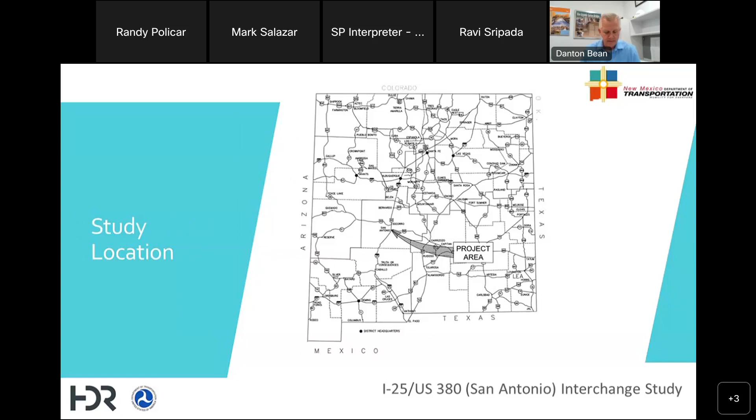Let's go now to the study location. So the project is located about 90 miles south of Albuquerque or 10 miles south of Socorro in the San Antonio area. The study area includes I-25 from milepost 139 to 140 and the interchange of US 380 with I-25 and all of those associated ramps. The study area also includes Walnut Creek, the major waterway in the area of the interchange.

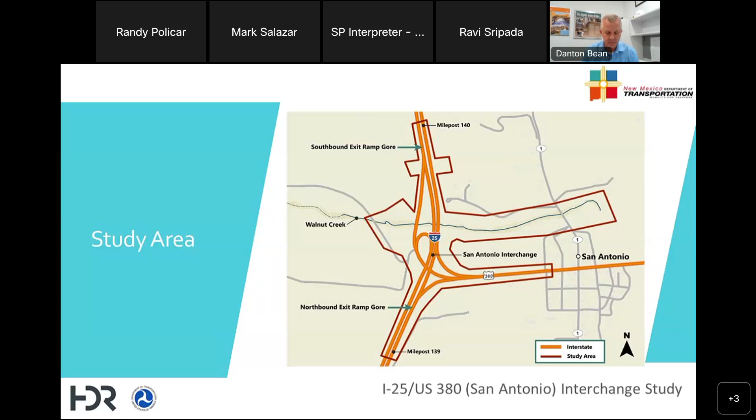So now that we've established the study area, let's talk now about the purpose of this meeting. We want to give you updates on the development and the status of this study. The team as always wants the public input in the development of a study. The daily users are the ones that know the area the best, and we want your insights and feedback to the issues and solutions.

We are currently in the study phase. We plan to hold 2 public meetings in this study effort to seek your input and comments. The development of the project will then move into the environmental investigation and documentation phase, and then into the preliminary design. The project will conclude with final design and construction.

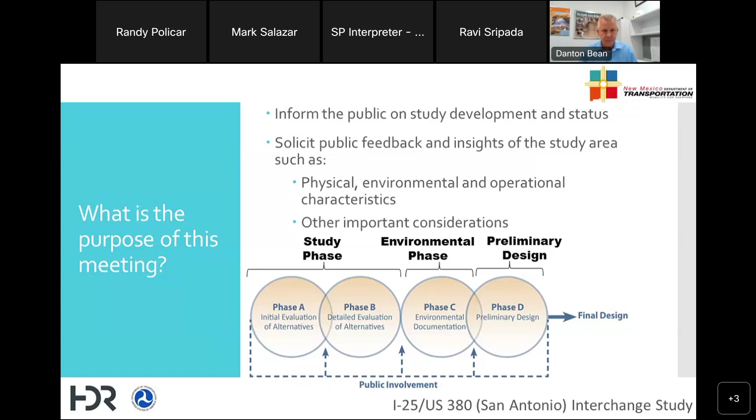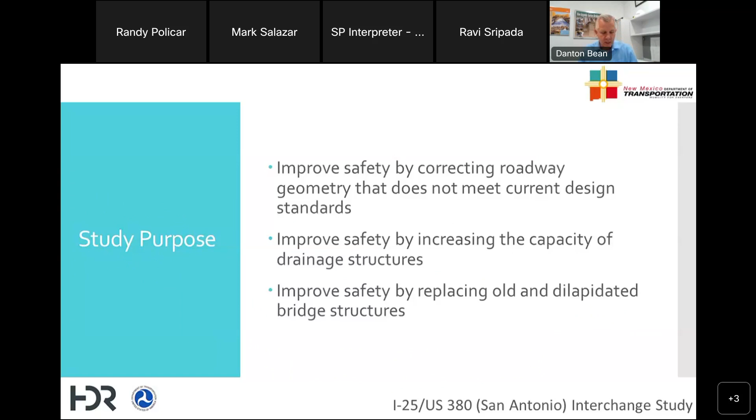So now the purpose of our study. Safety is always a top priority for the team. And so we're studying how to improve that level of safety. And that includes looking at the roadway geometry, drainage structures, bridge structures, and what we can do to improve that safety. So now we would like to present the different issues that we found in the existing conditions. And so I'd like to start with the roadway discipline and turn the time now over to Ravi.

Thank you, Danton. Good evening, everybody. My name is Ravi Sripada. I'm the roadway engineer for this project. I'll provide a brief description of existing roadway conditions and geometry for I-25 mainline, ramps, and for US 380 within the project limits.

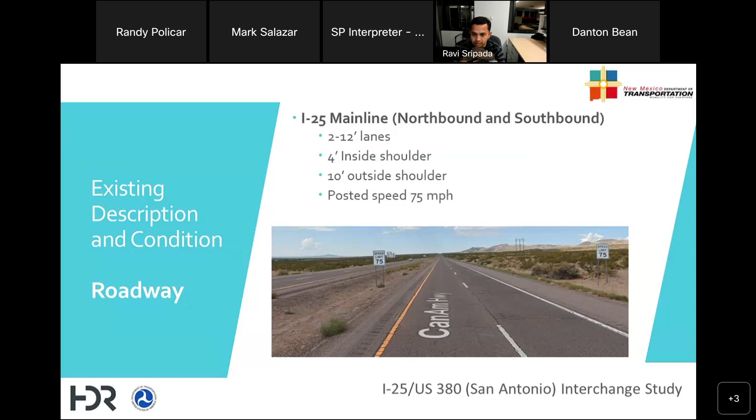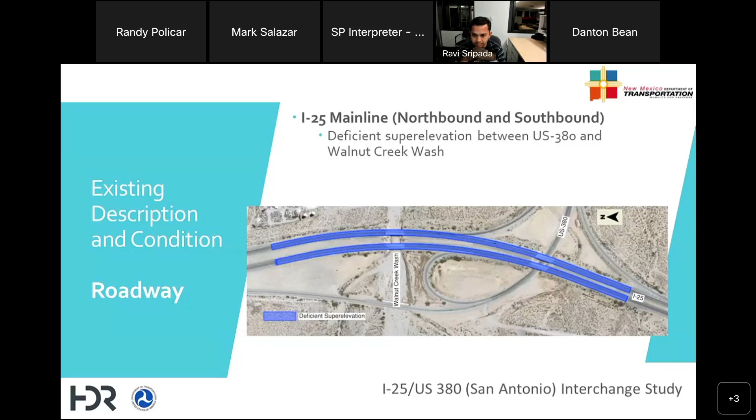As you can see in the picture, existing I-25 northbound on-ramp is yield controlled due to the lack of sufficient acceleration lane length for ramp traffic that is merging onto I-25. 1,160 feet is required for design standards. However, the existing condition only has 150 feet.

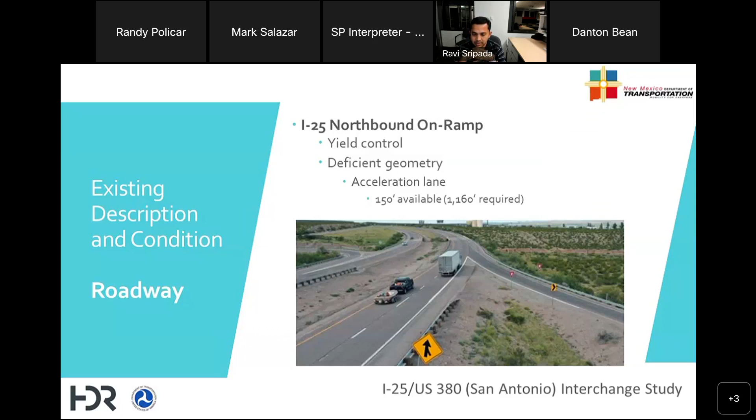Similar to northbound on-ramp, southbound on-ramp onto I-25 also has deficient acceleration lane length and is yield controlled. 1,518 feet of acceleration lane length is required for the southbound on-ramp. However, the existing condition again has only 150 feet for the ramp traffic to safely merge onto I-25.

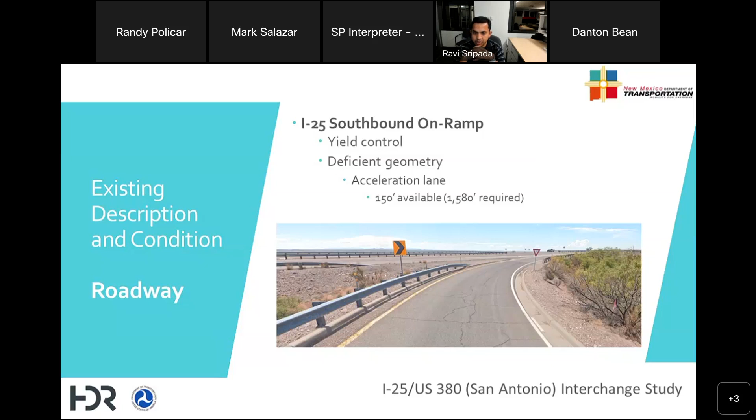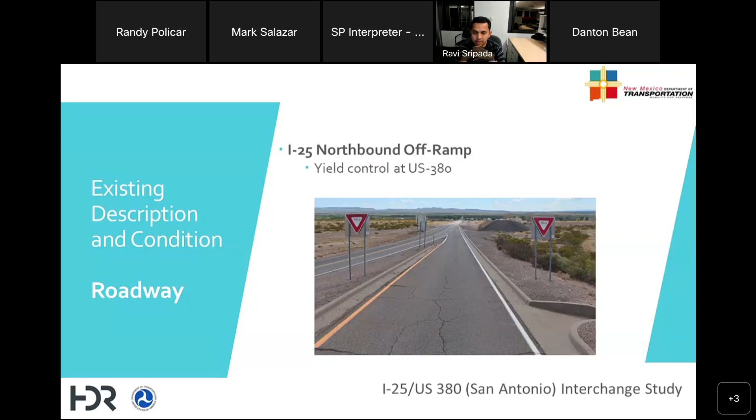Again, this is northbound off-ramp traffic merging onto US 380. Again, this is yield controlled due to the lack of sufficient acceleration lane length for safely merging onto US 380. This is a picture of existing US 380 looking west, and as you can see, US 380 has 1 lane in each direction with a posted speed of 40 miles per hour.

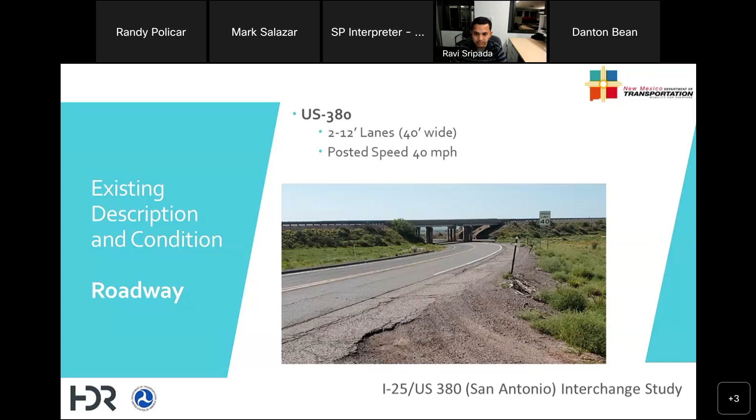In summary, existing on-ramps for both northbound and southbound have deficient acceleration lane lengths and are yield controlled at merge locations with I-25 and with US 380. Also, existing I-25 main lanes along the curve between US 380 and Walnut Creek have deficient super elevation. These existing deficiencies in roadway geometry will be addressed with the proposed improvements.

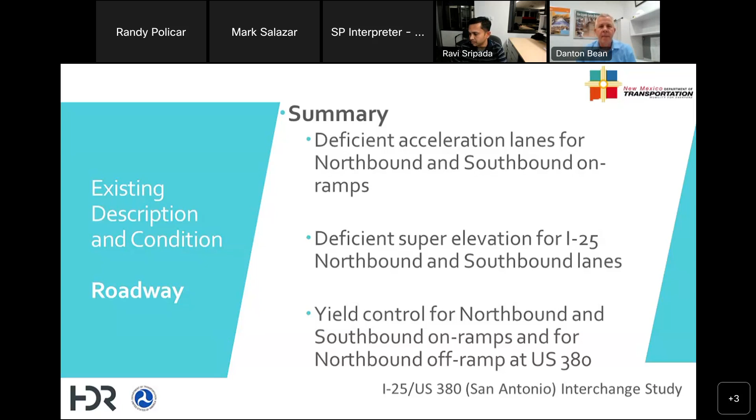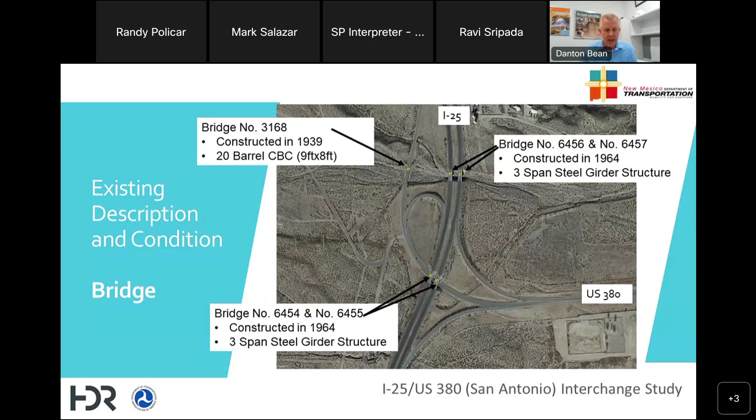Thank you, Ravi. Now I want to present our findings about the bridges. There are 5 bridge structures in the study area. Bridge number 3168 was constructed in 1939 and is a concrete box culvert. The other 4 structures were constructed in 1964, and those 4 are steel beam or steel girder structures. Let's get into more detail now about each one of the bridges.

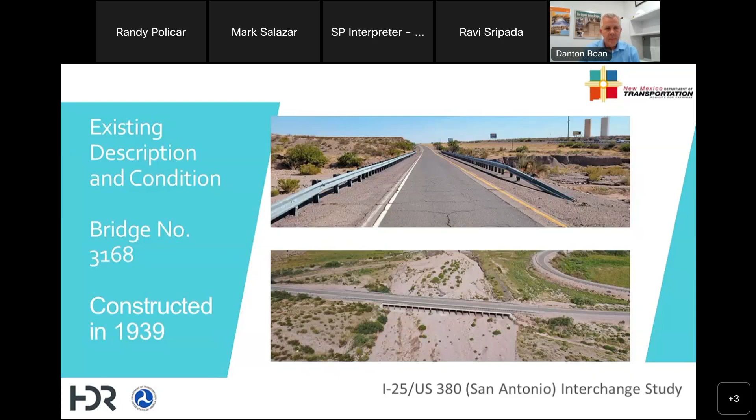Bridge number 3168 is a 20-barrel concrete box culvert that has really outlived its design life. As you can see in these pictures, there's some significant scour that has been stabilized with the addition of some gabion baskets at the outlet of this structure. We'll get deeper into the description of the drainage structures in a minute, but this structure is reported to have been a significant contributor to the flooding that occurred in San Antonio a number of years ago. Debris clogged up the structure and forced water down US 380 and into the community of San Antonio.

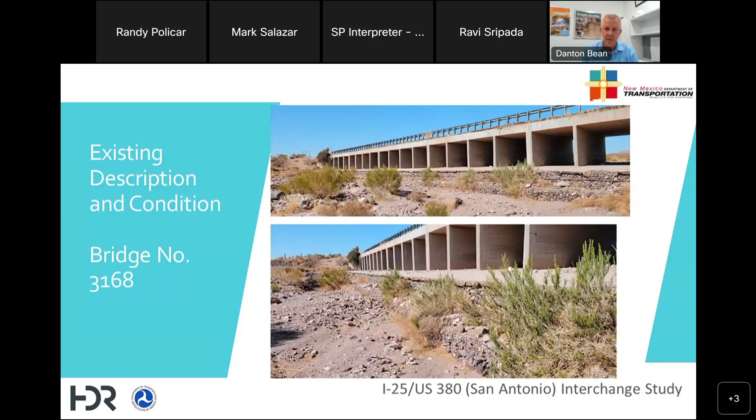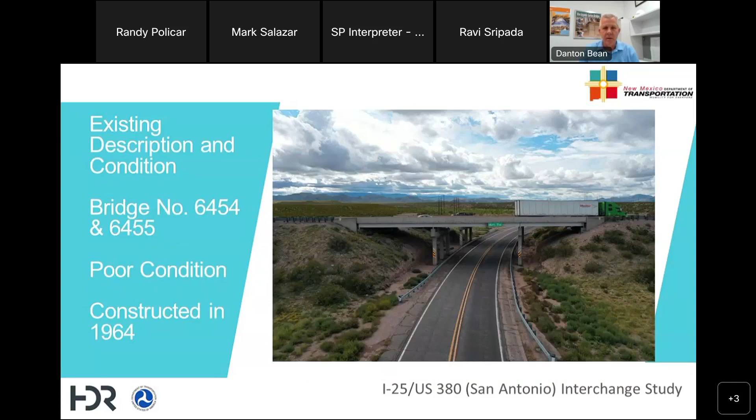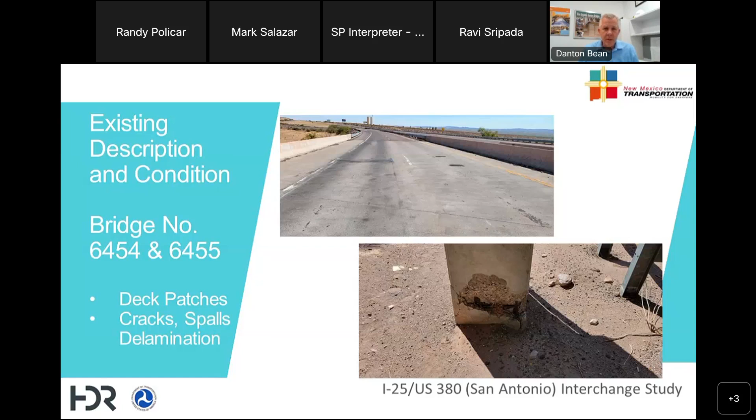So now we'll get into the interstate bridges. The inspection reports indicate that these structures are in poor condition and these structures are reaching the end of their design life. Some of the most significant issues are related to the concrete elements. These pictures show some cracks, spalls, and delamination in the concrete deck and superstructure elements. The structures have steel girders, which have some rust.

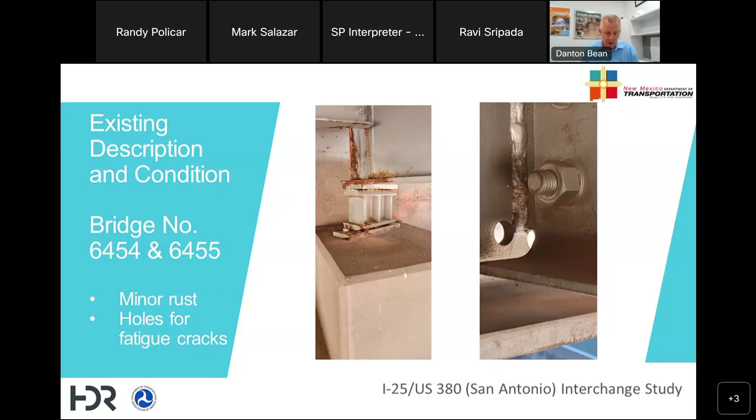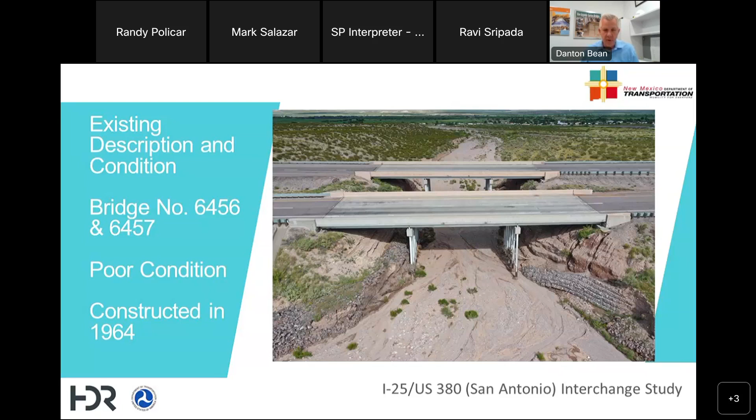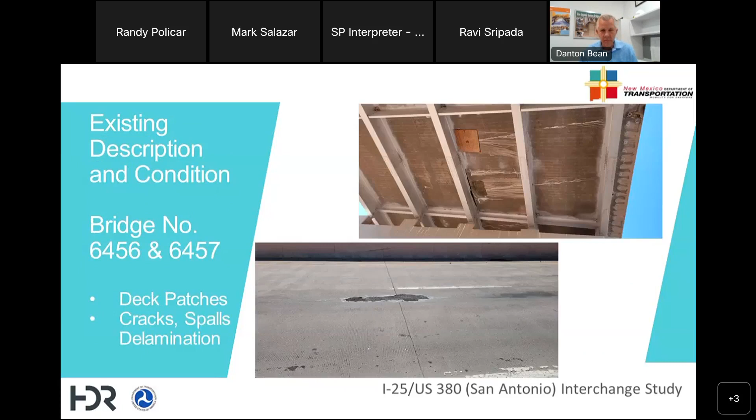The next bridges I want to talk about are over Walnut Creek, and they are in similar condition. The significant difference is the erosion or scour that has occurred on the abutment slopes and threatened to undermine the interstate. You can see in these pictures here that slope protection has been washed away. Here's another photo that shows the damage done to the abutment slopes and the riprap protection. Here are photos of the bridge decks that show patching and cracks and delamination. Again, the supporting elements are steel girders, which have some minor rust.

So in summary, for the bridges, they are close to reaching the end of their design life, and the team recommends that these structures be replaced with new structures that improve safety and decrease the maintenance demands and cost.

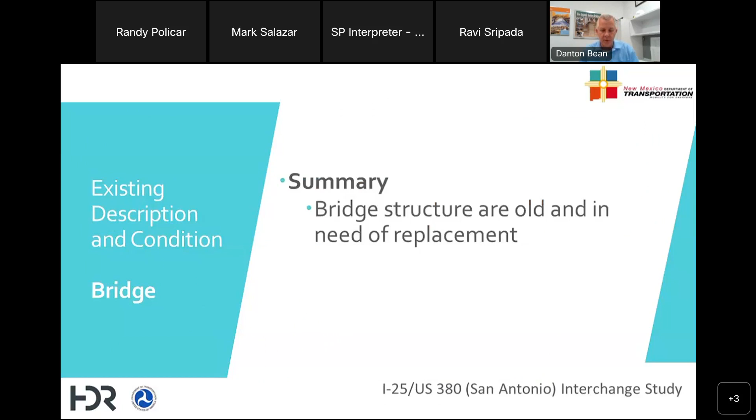So this interchange features quite a few drainage structures, ranging from 24-inch diameter culverts just crossing a roadway or a ramp, all the way up to the bridges spanning Walnut Creek. So we've studied each of these elements in detail to determine their existing conditions and whether they have the necessary capacity. And we did find throughout this interchange that there are significant sediment deposits where the pipes are starting to fill up with soil. And there's also evidence of quite a bit of scour and erosion throughout the interchange.

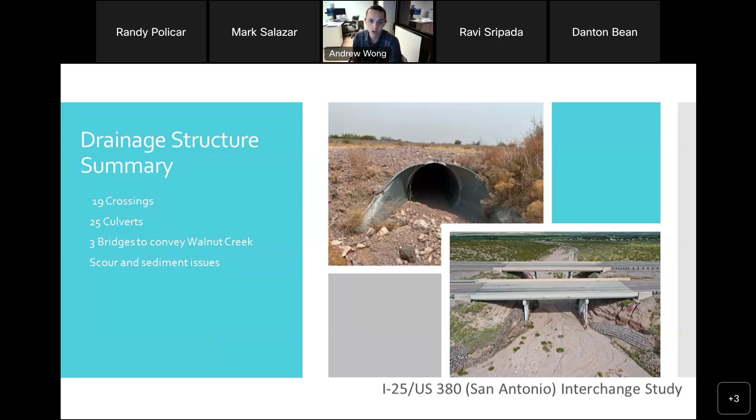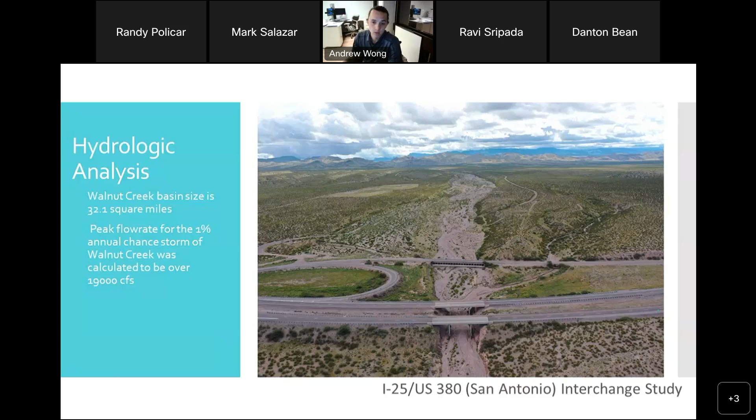So with any drainage analysis, we begin first with the hydrologic analysis, and this is the process of determining how much water is going to be flowing through each of the drainage structures, and that's based on the size of the drainage basin, the different soil conditions, and the amount of rainfall expected. So Walnut Creek is the largest flow path through the interchange, and it has a drainage basin of over 30 square miles. And this results in a 1% annual chance storm, also known as the 100-year storm, of over 19,000 cubic feet per second. So it's quite significant. So we take those numbers and we do the hydraulic analysis.

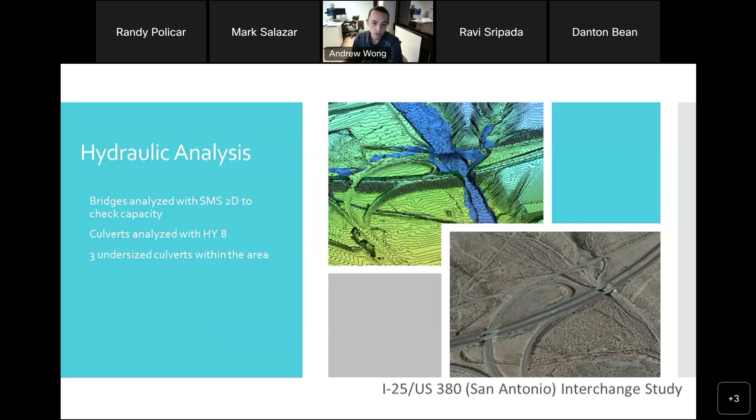So at the bridges crossing the waterways, scour is always a serious concern. As we found on field visits, the existing bridges do have quite a bit of erosive scour. The riprap that's meant to protect the slopes has largely collapsed, and the bridge piers have quite a few feet exposed, more than was originally designed. These field observations also agree with our scour analysis, which does suggest that the channel may need to be widened, and other protection may need to be added to help make sure that the bridge is safe from scour.

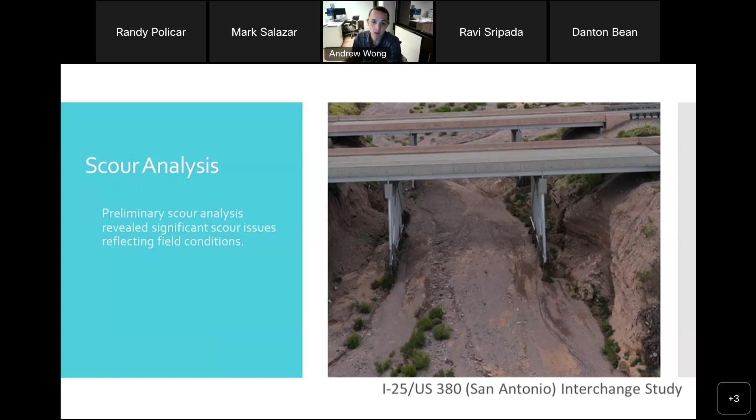As far as the drainage improvements, we do have a few different priorities in mind. The first is always just to make sure that we do not negatively impact the areas downstream. So we study the existing conditions and then model our proposed conditions to make sure that we're not going to make anything worse downstream. The second priority is to make sure that the new interchange doesn't flood and will continue to be operational for the average year-to-year type rainfall events.

And finally, our final goal would be to reduce the amount of maintenance; it's costly, and it can cause the interchange to not operate as intended. That means reducing scour and reducing sediment, and should help extend the operational life of the interchange.

So for this study, we are recommending to upgrade the undersized culverts, and there are some other modifications that would be needed depending on the different roadway improvements that are selected. But of course, the most significant drainage recommendation is that the new Walnut Creek Bridge will need some modifications of the channel as well as scour protection, just to make sure that it is protected structurally. Now I'll hand it off to Sanjay to talk about the traffic conditions.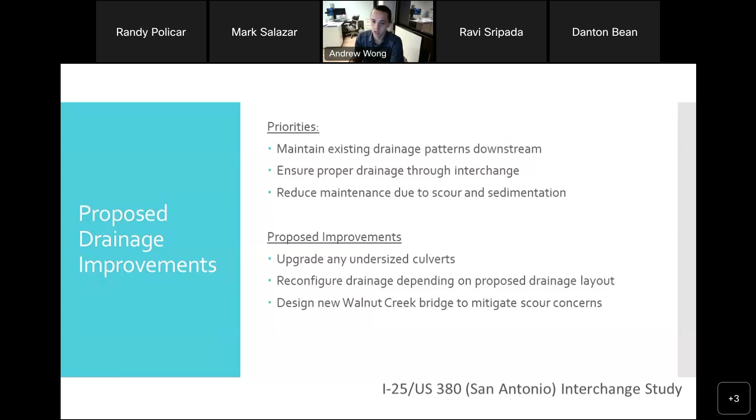Thank you, Andrew. For traffic analysis, we focused on both the capacity part and the safety part. To do so, we collected traffic volume data, vehicle classification data, and also speed data. We also obtained the crash data for the last 5 years from NMDOT, and we reviewed those. For the traffic data, we collected the data for 24 hours, on both I-25 and also the critical movement between US 380 and I-25.

Additionally, we went to the field and inventoried the existing signing, marking condition, the pavement surface condition, and also we observed the traffic condition just to have a feel for the traffic operational condition for the existing configuration. We also extracted historic traffic data and obtained the statewide travel demand model and extracted the traffic data from that. When we consolidated existing data, historic data, and the model data, we were able to predict the future volume 20 years from now, which is 2042.

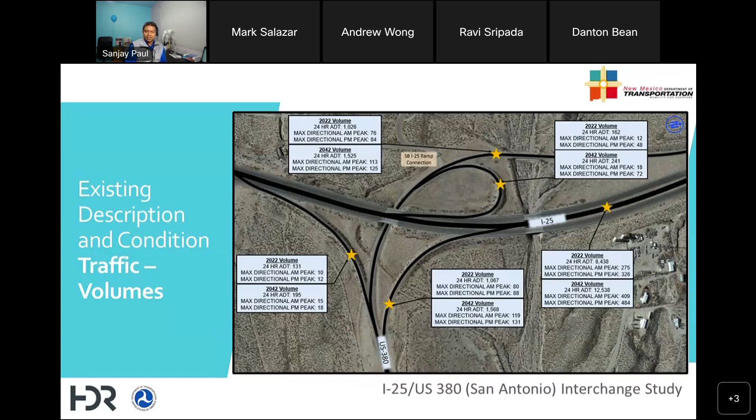So we had the existing condition traffic volume and also the future traffic volume for all those critical movements. Then we used sophisticated computer software, HCS and Synchro, and analyzed level of service for those critical movements. Level of service is presented using letters from A to F, A being the best. The level of service analysis combines the existing capacity, volume, and also speed or delay. We found that the number of lanes we have on I-25, 380, and the ramps have sufficient capacity to serve both existing and future year traffic volume.

In terms of the traffic signs and pavement marking, we found them in fair and good condition, but the study team is recommending to replace them with new signs and new pavement marking. There are different kinds of pavement cracks that the study team observed in the field, and we recommend reconstruction of the pavement.

In terms of traffic safety, it was not a major issue there, but speeding was a major issue in the project vicinity. We also have heavy vehicle presence on both I-25 and 380 and all those ramps. So the study team strongly recommends putting in sufficient acceleration and deceleration lanes on those on and off ramps, and also partial lighting near the gore area. With that, I will now hand it over to our project manager, Danton.

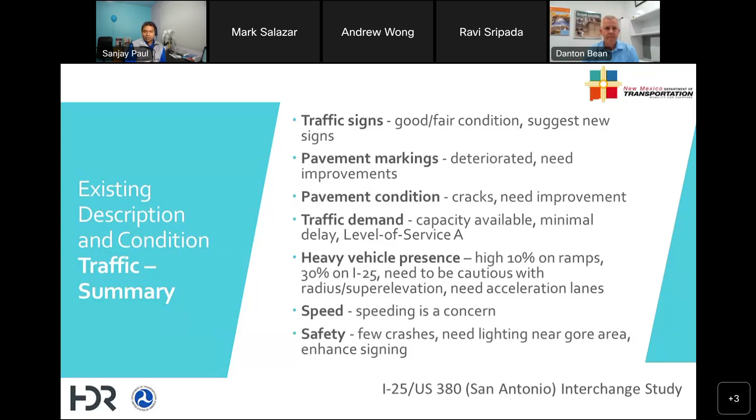Thank you, Sanjay. So in summary of the existing conditions or the issues that we found, I think everybody that has used the interchange recognizes that the on-ramps have deficient geometry.

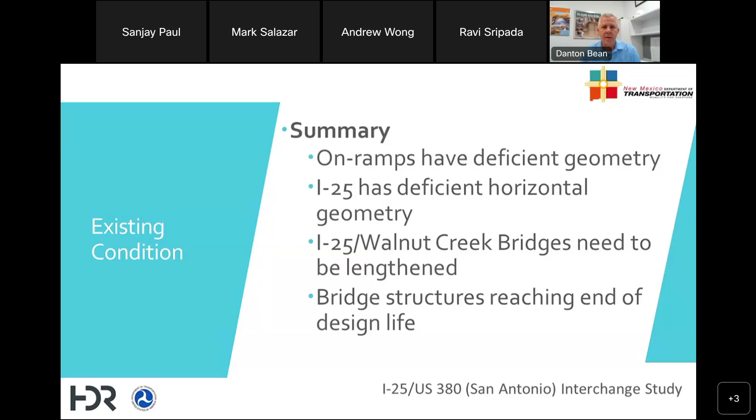I-25 through the horizontal curve is deficient with the super elevation. The I-25 Walnut Creek bridges need to be improved to improve the hydraulic flow through Walnut Creek. And then the bridge structures are reaching the end of their design life. So those are the major issues that we would like to correct that we've identified at this point in the study. So now let's get into the proposed alternatives.

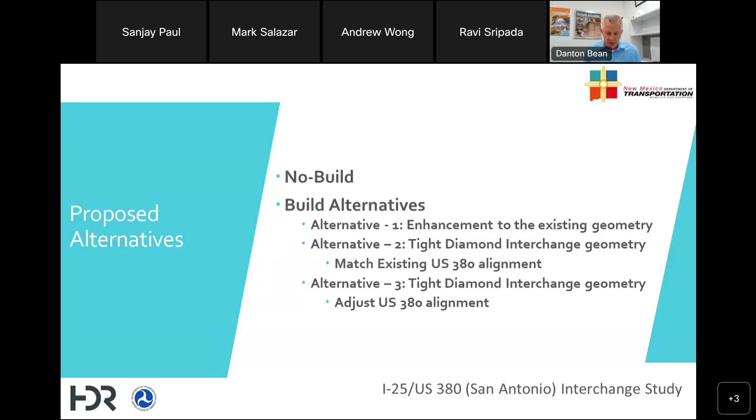The no-build alternative is always considered in the development of a project. The no-build alternative means that no improvements or modifications would occur. Along with that alternative, we've developed 3 build alternatives. And those alternatives would mitigate those issues that we've identified in different levels. So the first alternative is an enhancement to the existing geometry.

And so in this alternative, acceleration lane and merge lanes would be added for the on-ramps. The interstate would be reconstructed through the horizontal curve to correct the super elevation. The merge area between the northbound off-ramp and US 380 would be improved to add an auxiliary lane. And then the bridge structures over Walnut Creek would be replaced to improve the hydraulic flow for Walnut Creek.

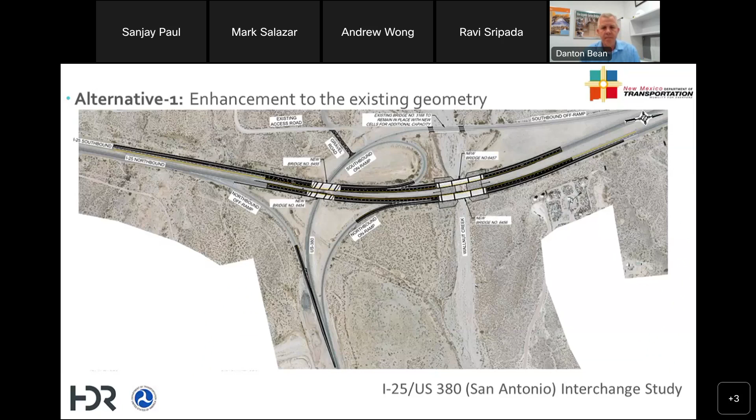So some of the advantages and disadvantages of this alternative: the advantage is that it has the lowest cost of those build alternatives and really doesn't impact right-of-way. And of course, it improves those northbound and southbound on-ramps. The disadvantage to this alternative is this interchange layout is not modern and doesn't meet typical user expectations. And also, it does not replace the concrete box culvert, and that is so old. Okay, so let's go on to the next alternative.

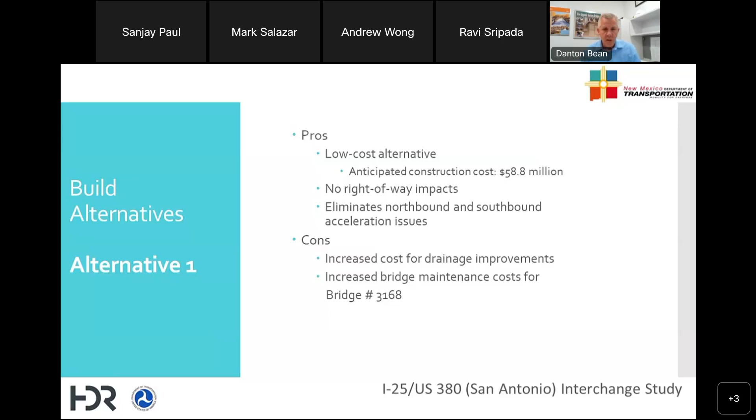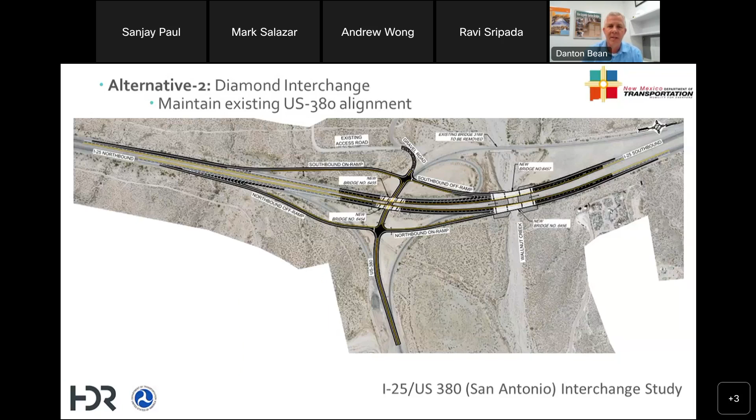So some of the advantages, disadvantages here: again, it corrects the on-ramp issues that are present there today. It improves Walnut Creek and it eliminates the concrete box culvert and eliminates that structure from the state's inventory list. The disadvantages are that the construction costs are increased, and the ramps come to a stop condition at the US 380 intersections.

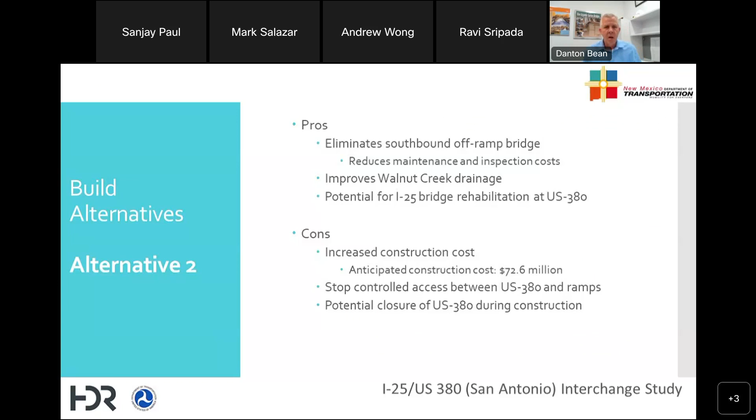Okay, alternative 3 is also a diamond interchange, but the alignment of US 380 is moved further south. And this gives some more distance between the Walnut Creek bridge structures and the US 380 intersections. This alternative again replaces the bridges over Walnut Creek and US 380. It removes the existing concrete box culvert from the inventory list and from the study area.

So some of the advantages, disadvantages for this alternative: again, it improves the on-ramp situation. It improves the Walnut Creek drainage, and there's some advantages in the maintenance of traffic during construction. It allows US 380 traffic to stay open during the construction.

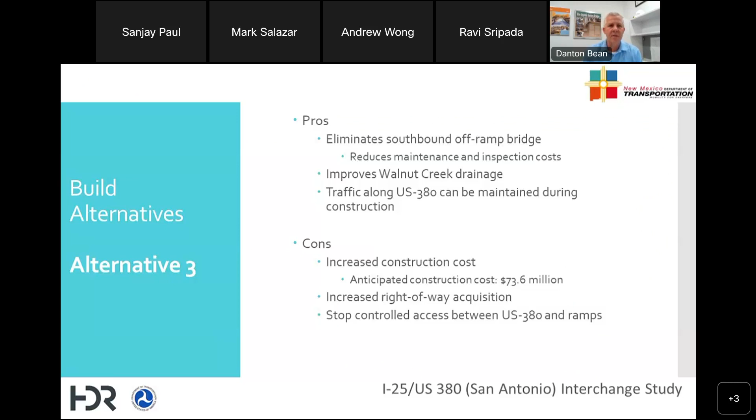Some of the disadvantages are related to the construction costs. Those would go up with more elements being reconstructed. There is an increased amount of right-of-way that would be needed with this alternative. And again, there's stop conditions at the intersections of US 380 and the ramps. So those are the 3 alternatives that are proposed with the study to correct the issues we've identified.

So now let me give you an idea of where things are going to be going. We started the study in the spring of this year and expect to complete the study in the spring of next year. We plan to hold another public meeting in the early part of 2023. And we'll present more detailed information on the alternatives and incorporate input from today's meeting.

The preliminary design and environmental investigation and documentation efforts will start up as soon as possible after this study. That will lead into the final design efforts. At this point, the construction funds have not been programmed, so the construction schedule is not known. So some of those dates or schedule of those things are yet to be determined.

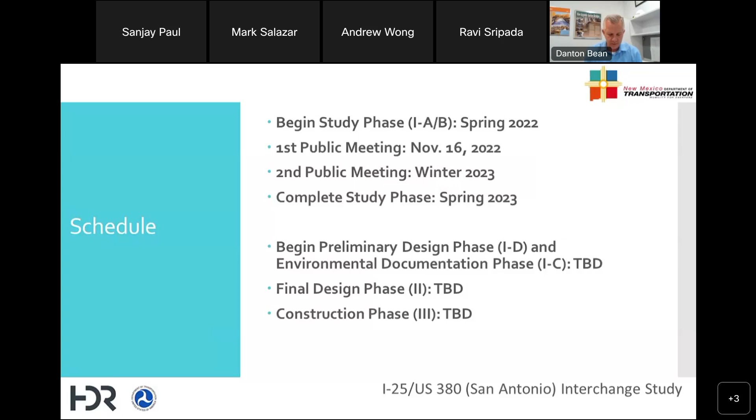All right, so this is where we need your help. Are we on target? Have we found the issues? Are there other issues that have been missed? And what are your thoughts, comments in regard to the proposed alternatives? Randy, do you want to give us some instructions on how we can go into the Q&A session? Absolutely. Thank you very much, Danton.

Our public comment period extends through December 16th, 2022, and there are a number of ways that you can provide comments. At tonight's meeting, you may ask questions to the study team. We will try to take questions in the order they were received. If you aren't ready to comment tonight and would like to take more time to provide your feedback,

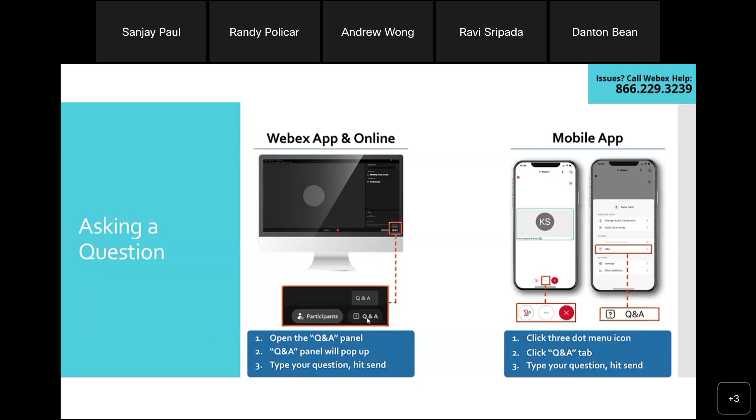A reminder, if you're having technical issues, please contact WebEx Help at 866-229-3239. We will do our best to respond to the questions in the order they are received. Please be patient as we may have many questions. If needed, we can extend our meeting time to respond to questions. If we still have outstanding questions at the time the meeting ends, we'll respond to written questions as part of the meeting summary and provide to participants via email and post on our project webpage. For those on the phone, you may submit your questions or comments by phone or other methods following the meeting. We will now begin with our questions.

And we already have a couple of call-in users, so I'm going to go ahead and ask our first call-in user to unmute. Randy, while you're doing that, I wanted to mention that we've received quite a few comments through the website, which we appreciate, and we'll get those recorded into the summary. Again, thank you all for those comments that have been submitted. Call-in user, you've been unmuted. Go ahead and ask your question or make your comment.

My name is Rex Myers, and I'm with the Friends of the Bosque del Apache, and we wanted to go on record noting the heavy traffic volume that comes down to visit Bosque del Apache, both New Mexico residents and out-of-state tourists, and the dangers that we think they face in the on-ramps. And so we're very, very concerned. And if I'm hearing correctly, it sounds like that's a major consideration in the study, and we support that very, very much. The on-ramps, we think, are very dangerous for people unfamiliar with the area. Thank you very much.

Thank you. We appreciate that comment, and yes, definitely, that's been a common message in the comments we've received, that those on-ramps are a safety concern, and definitely I've recognized that. Thank you.

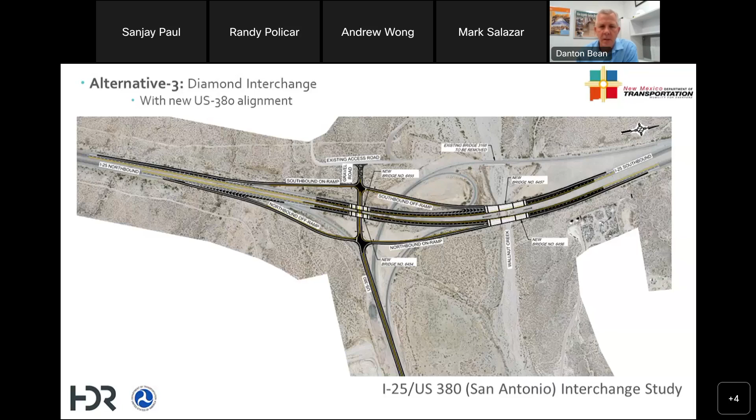During construction, there may be temporary closures of US 380, depending on the alternative. And, as I mentioned, there would be detour routes developed when those closures do happen. We haven't gotten deep into the development of the phasing of the construction of these alternatives. That's something that we hope to be able to present in more detail at the next public meeting.

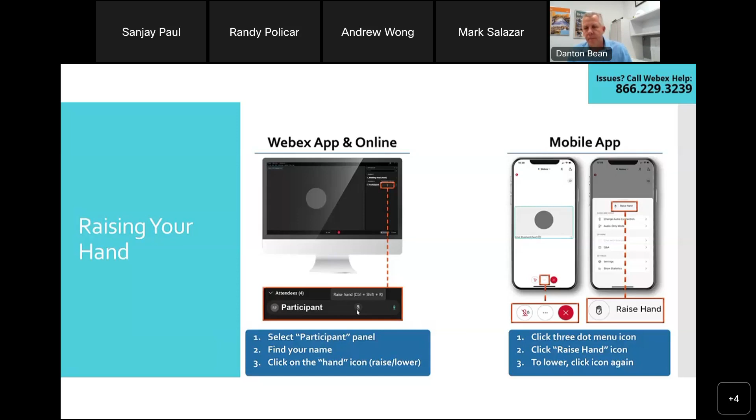And just one more thing on that, and then I'll let you talk, is as it's going under the bridge, are you guys expanding that out? I think you already mentioned that it's not going to affect downstream, or you're going to make sure that it doesn't affect downstream. By widening that out, are you going to be allowing more water or less water? Or is it going to be allowing the water to slow down if you widen that? Maybe some of those kind of comments from a drainage perspective.

It's good, thank you. Andrew, I'll cue you up here in a minute for the drainage response. But first, as far as the merging acceleration of those large vehicles getting onto I-25, we definitely recognize that as something that we need to think about. The proposed improvements with alternatives 2 and 3 and even 1 add a significant length for acceleration.

The challenge is that you're going up in elevation in grade, and so some of those you would need a mile or even more to get those large trucks up to full speed, and we really can't add the auxiliary lanes that far. But the benefit of those improvements is that you've got the auxiliary lane that allows for merging, and so I think things will definitely be improved with those alternatives in that nature.

Let's see, the other part of that you asked about was in regard to Walnut Creek downstream. We currently do not anticipate improvements of Walnut Creek that far downstream. We included that area so that we can properly model Walnut Creek and get the comparison of existing conditions to those proposed conditions. Andrew, what do you want to add with regard to the drainage?